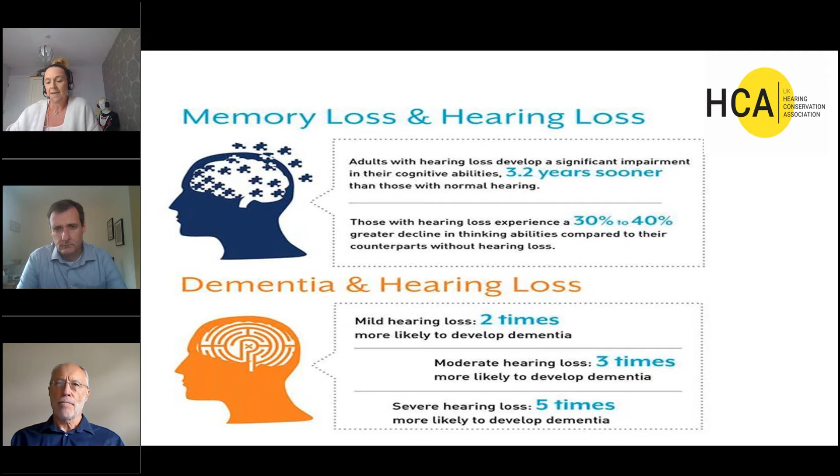But there are apps, and I know the iPhone you can download something which can track your listening levels and give you advice. So again, something that maybe we don't often do in terms of trying to influence people's activities outside the workplace, but when we think of the added exposure that that's bringing, it's obviously going to be really significant. This is something to think about.

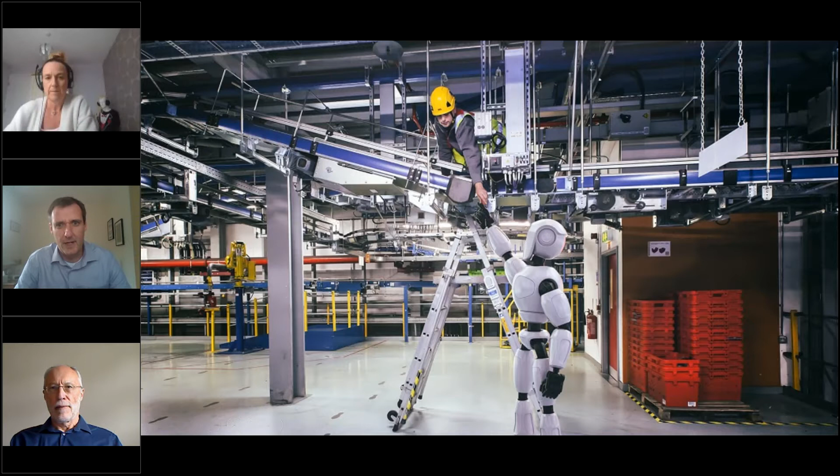Before I jump into all that, I think for a lot of people, the assumption is that the modern workplace is quite a swanky and technologically advanced place where you might even have a robot helping you out. Sadly, for a lot of people who are at work, whether that's in a factory, on a construction site, or outside, the reality is quite different.

It gives you a sense that maybe people aren't taking as much care as they should. For me specifically, when I'm dealing with noise issues, when I'm looking right at the very bottom of the control hierarchy, I'm still seeing poor performance for things like hearing protection.

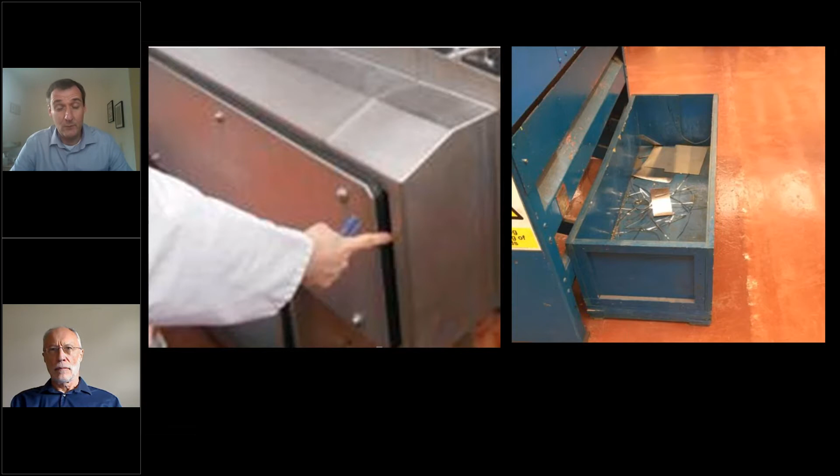As we start to move up the control hierarchy, we still see issues. So even when people have made an effort, we get problems. So the photograph that you can see on your left, this is a machine where there's been some noise enclosure built round about it, and during some routine maintenance, the panel of it wasn't replaced properly, so there was noise leaking out the side. So there seems to be a general lack of understanding, even when controls are put in place, as to how it works and what it's supposed to be doing.

The photograph that's on the right-hand side, that's from a steel manufacturing site that I went to, and this is actually the back end of a guillotine. So you're probably wondering, why am I showing you this? Well, what the company had done was, that used to be a steel box that collects all the scrap metal, and they've replaced it with a wooden box because they thought, well, it'll be quieter, which it was. And admittedly, it's not a particularly exciting and interesting way of controlling noise. It's maybe not the most effective way to do it, but it does make a difference.

The reason why I'm showing you this is, some of you may know I post quite a lot of stuff on LinkedIn. Normally, if I post things on LinkedIn, I'll be lucky if I get about 600 people looking at it. When I posted that wooden box on LinkedIn, I got about 8,000 people looking at it. And I just think that if 8,000 people are interested in looking at a wooden box, there's clearly a demand and a desire to find out how you control noise.

The second aspect, the thing about competent consultancies, I'm sure some of you are aware of this case where a consultant was taken to court for not providing good advice on noise, hand-arm vibration and COSHH. And the fine that he was issued with, the £1,400, is relatively small, but I can safely say, as somebody who used to be a consultant, that being found incompetent in a court of law and having press headlines and industry paper headlines saying that I've been publicly humiliated would be pretty detrimental to being able to carry on doing my job, if that sort of thing had happened to me when I was a consultant.

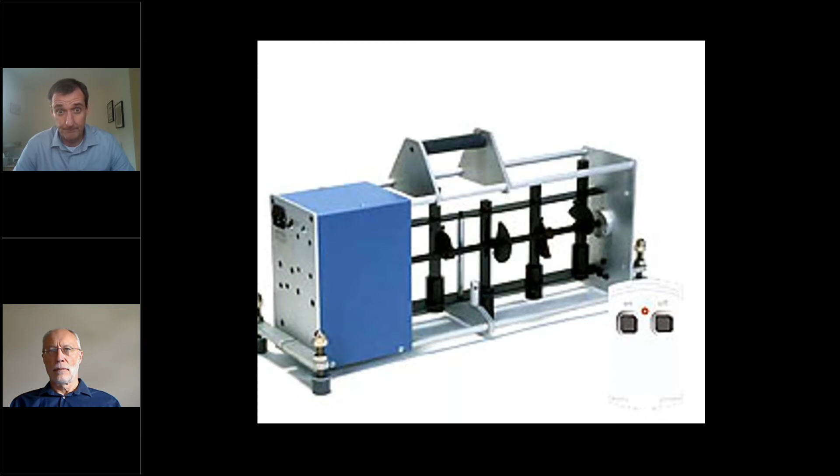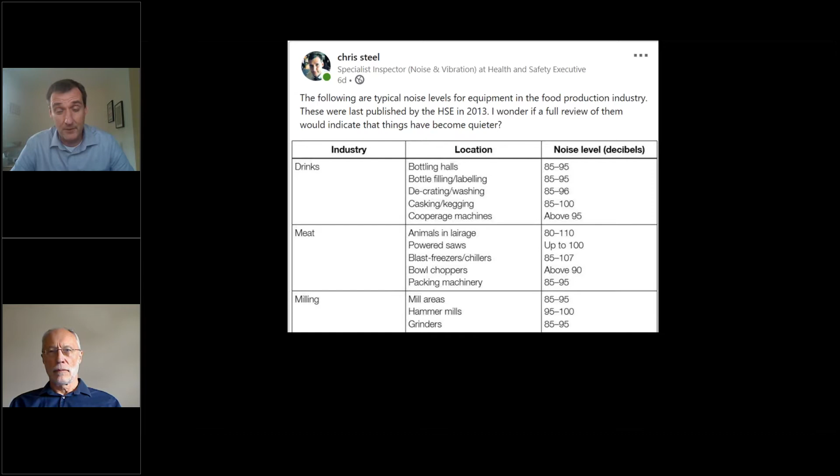The other thing that I mentioned there was the idea of credible noise data, and this year again, this is me posting stuff on LinkedIn, and this is actually taken from a document called Sound Solutions for Food Industry. The information that's in this was republished in 2013, but the noise data you're looking at is probably from the late 90s and early 2000s, so not the newest thing.

Instead of getting my usual 600 people looking at it, I got 5,000 people looking at it, and actually got emails from people as far away as Canada and India asking me, oh, do you have any more of this type of stuff, because we really have an issue getting credible noise data. And that's a perennial issue for the HSE.

Back in 2012, we did some reporting on whether people can find quiet machinery, and most people agreed that they couldn't. And that's not because quiet machinery doesn't exist. It's because it's difficult to find the information that would indicate to you that it is quieter when it's in use. And then similarly, when I did a straw poll myself, I found that in 2020 about 80% of people were also finding it difficult to find reliable noise data when they were asking for it.

So those three things, those three C's, control of noise, competent consultancy, and credible noise data, are the three things that the HSE tends to want to concentrate on, because those are where we find the biggest issues. I suppose the obvious question that comes out of that is, well, what is the HSE doing about this? What's the HSE doing on noise, and why can't we do more?

And I'm probably going to go a bit off message here, but I would ask a question: how much money do you think British industry spends on third-party health and safety advice in a typical year? So this is for all health and safety advice, not just noise. Well, obviously you can't answer me because you're all at home or on your computers, so I'll tell you what it is. It's about £1.2 billion a year spent on third-party consultancy. So roughly that's 10 times the central government budget that the HSE gets.

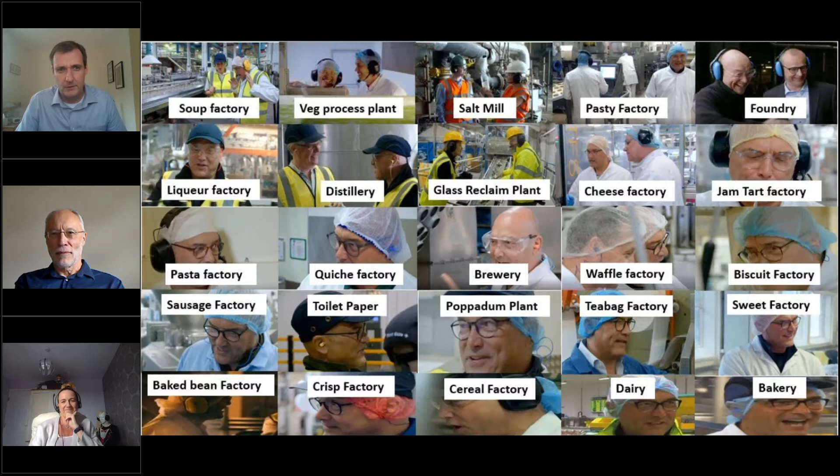I always find that a good way to get a little barometer on that is to sit down and watch a few episodes of Inside the Factory with Gregg Wallace, because you'll find that in pretty much every single episode of that programme, Gregg or Cherry will be wearing some sort of hearing protection, whether he's at a factory making biscuits or working in a brewery. There's noise, and that's a pretty obvious indication that there's still a lot of people in the UK who go to work every day and are exposed to noise at a level that's likely to be damaging to their health. Otherwise, why would they be wearing hearing protection?

Now, I don't want to end this talk with a load of photographs of Gregg Wallace, because it might make you think that I'm stalking him in some bizarre way.

So I'll just leave you with a quick recap, and just to remind you that if you're interested in doing noise management and noise control, those 3 C's, control of noise, competent consultants, and credible noise data, are the key areas that we see you can get the best improvements in terms of reducing noise overall. And I wish you the best of luck with that.

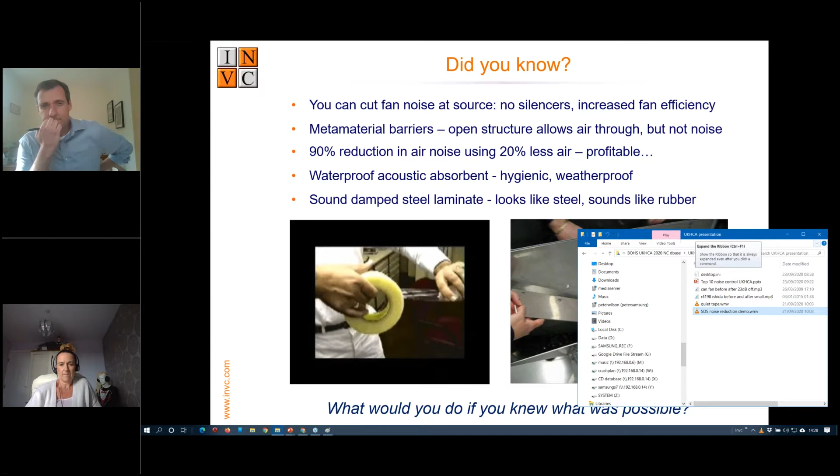Now, I do have a video here. Let me play this. If we look at this, this is an example of using that. Let's hope you can hear it.

Okay, I'll forget about that then. The sound is not coming through, and my computer's gone mad, so you have to take my word for it. This is extremely quiet when you're dropping things onto it.

The other thing is, another example of perhaps something you wouldn't know: who would think sellotape was noisy? Well, I've been in areas where they're packaging and building cardboard cartons, where you're measuring over 100 dBA from sellotape. And there is the weird idea, which I think is pretty cool, but maybe I should get out more, of quiet tape. And you can buy that off the shelf. So rather than putting an enclosure around the machine, you just buy quiet tape.

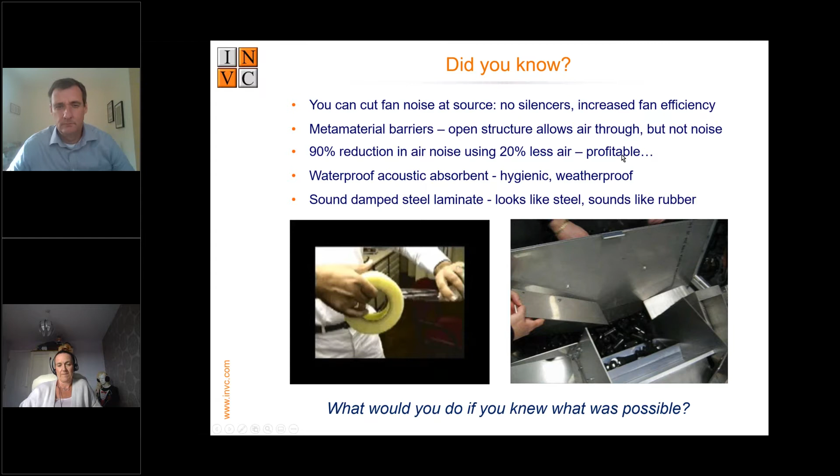Now, if you knew about all these things, what would be possible? As an engineer, I find it really depressing that companies spend 3 to 10 times what they need to spend on noise control and don't get the results that they could get by using better engineering technology. Now, these are the top 10 noise control solutions that we've put together that cover a large number of very typical noise problems across many industries. So I'll be going through these very quickly.

The first one is vibration control, which is vibration damping and vibration isolation pads, both very quick and easy to do. Fans, the way you install them, and new technology for reducing the noise from fans. Pneumatics. I can boldly say, with all these years' experience, there's absolutely no reason why you should have unsilenced pneumatic exhausts on any site, and I'll tell you how you can do that. Pneumatic nozzles, you can save a lot of money by switching to efficient units.

And also chains, timing belts, electric motors, hydraulic power packs, other classic noise sources. A lot of machines have safety guards, but a lot of them don't work as acoustic guards, and it's quite easy to convert one into the other.

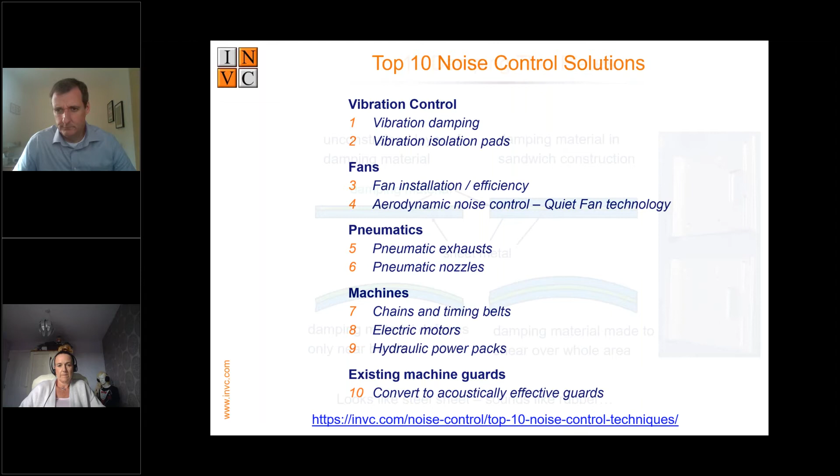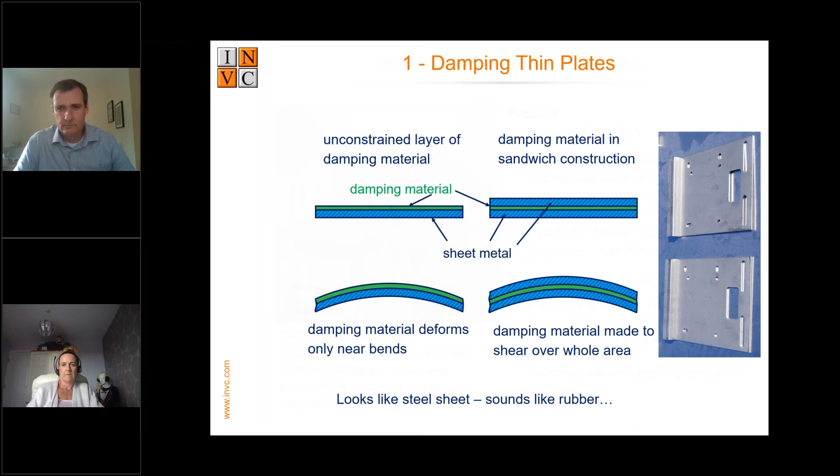The typical application for that is in weighing machines. A lot of industries use weighing machines for sweets, for vegetables, for nuts and bolts, whatever. Typically, noise levels are 87 to 98 or even higher. They're often sold with enclosures, which quite often actually increase the noise level underneath the platform because they're funneling the noise downwards. And they cause hygiene problems in the food industry.

Now, we've developed a solution for this, which largely involves using laminated steel and a few other engineering tricks, which are about a quarter of the cost or less than an enclosure, much more effective, and don't cause hygiene problems. This particular application, 94 dBA with the enclosure in place. With the enclosure removed and all the surfaces damped, it was down to 82 dBA. And also it meant the cleaning time was reduced from a whole day down to about an hour. Now, the manufacturers know what we do, but they make more money out of selling enclosures.

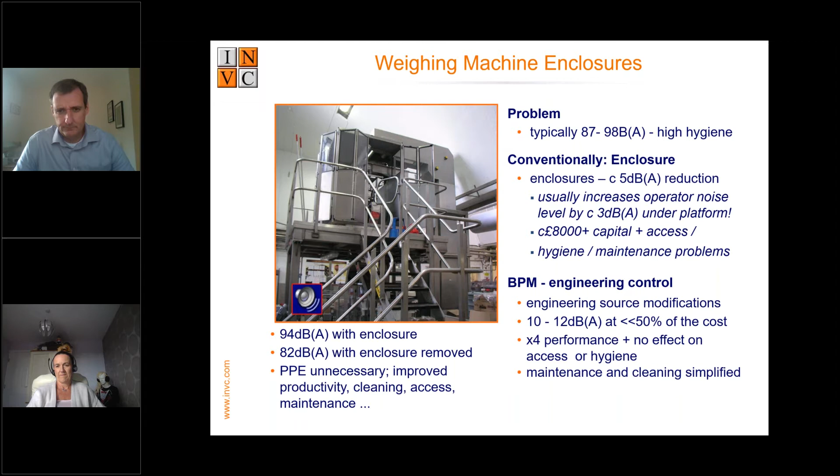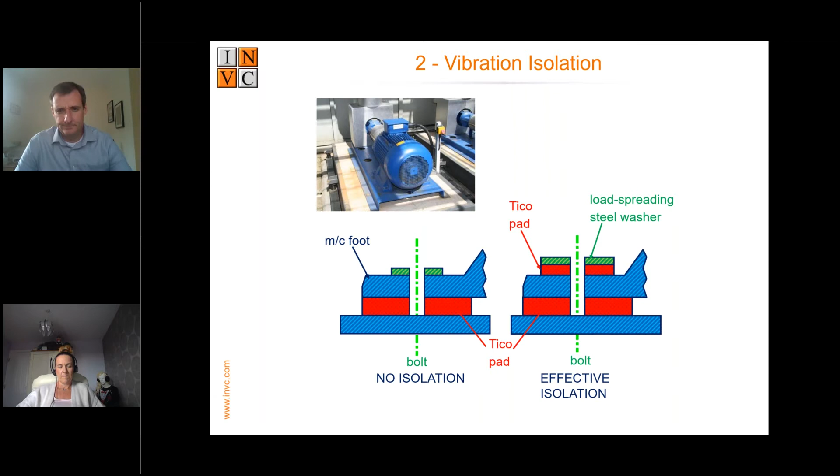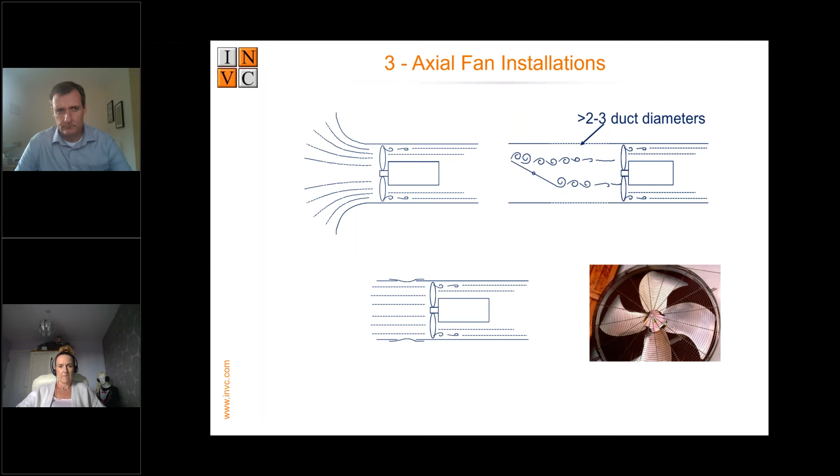If you can increase fan efficiency and therefore reduce the speed of the fan, apart from the cost savings in terms of power, you get a big reduction in noise because noise is proportional to the fifth power of fan speed. So a 20% reduction in fan speed reduces the noise by 5 dB, which is a factor of 3. So 20% off fan speed, you get 67% off the noise risk.

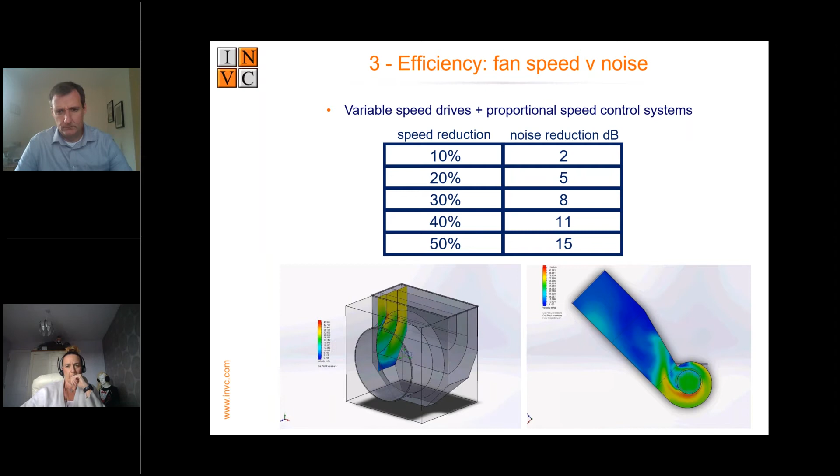If miraculously you can reduce the fan speed by 50%, you reduce the noise by a factor of 30, and therefore the risk by a factor of 30. So efficiency is a key point in looking at any fan system noise. There are also aerodynamic fan noise control technologies.

In this particular case, you've probably lain awake at night wondering what system they use to suck aluminium cans that are bent or broken off the line so they get recycled. Well, they use what are called chopper fans, which suck the damaged cans off the line, and then the cans are shredded by passing through the fan. As you can imagine, it's a pretty noisy process, and this caused both environmental and occupational noise problems.

Massive noise problems. They were quoted £35,000 for silencers, which had to have the cans go through them, lagging enclosures and so on. Instead, they went for aerodynamic noise control, which cost about £3,000 per fan and reduced the noise by 22 dBA, a fraction of the cost and without all the hassles. So knowing what is possible can mean that things get done to reduce the risk rather than just being left or postponed because it's going to be expensive.

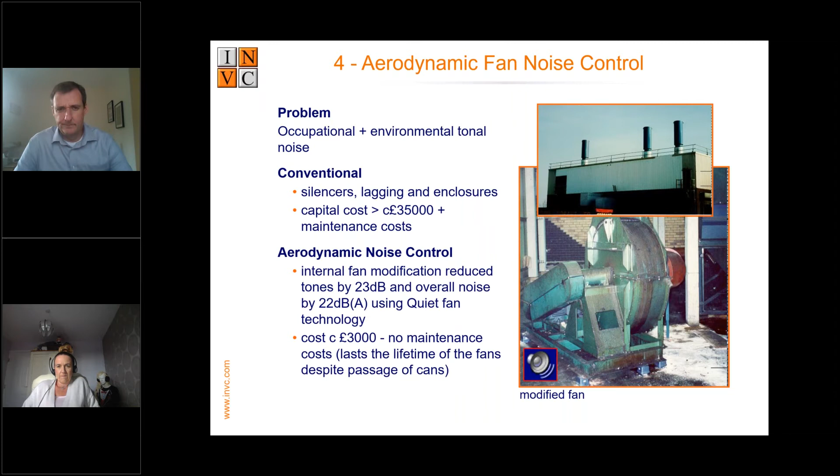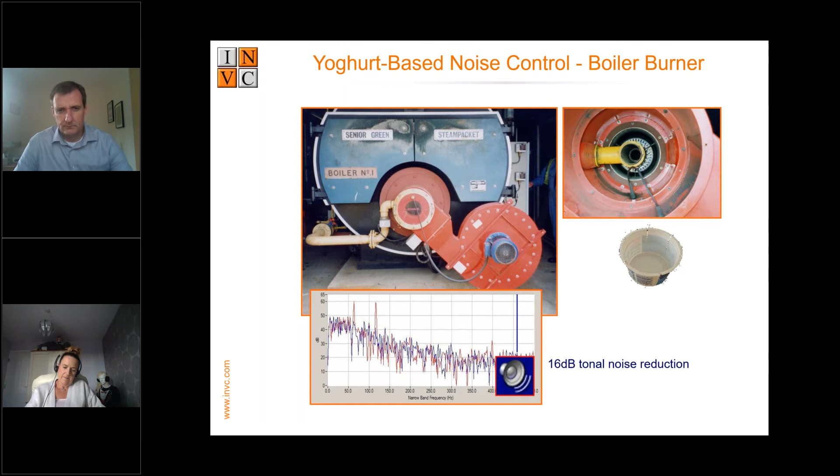Just as an aside to show you what can be done, a colleague of mine fixed the noise from this boiler burner by using a yogurt pot. It's the only known case of yogurt-based noise control. He said, I think it's the burner problem. Got a yogurt pot from the canteen, did a Blue Peter exercise cutting it up, and now they just have aluminium yogurt pots inside the burner. That reduced the tonal noise problem by 16 decibels. So it's knowing what is possible.

Pneumatics, very common noise source. Now, there are probably about 70 or 80 different types of silencer around, and the big problem is a lot of them don't work very well, and they can cause back pressure, which can affect the operation of the machine. However, you can buy straight-through silencers, and the bottom picture shows manifolding multiple exhausts into one straight-through silencer. So you can stick a 1 or 2 inch pipe along the side of a set of machines, plumb all the exhaust ports into that, and stick a straight-through zero back pressure silencer on the end.

Also, I recommend standardizing on 3 sizes of silencer across the whole site. So you have small, medium, and large. That way, you can just replace a silencer with one of those. You just fit adapters to make sure they all fit. That makes life easy for the maintenance engineer, because if a silencer goes missing, the machine still works. It's just that it's very noisy.

Efficient off-the-shelf entraining nozzles are about 10 dB quieter at the same thrust and use 20% less air. They're also intrinsically safe. They pay for themselves very, very quickly because they use less compressed air. So there's really no excuse in almost all circumstances for not using these sorts of nozzles.

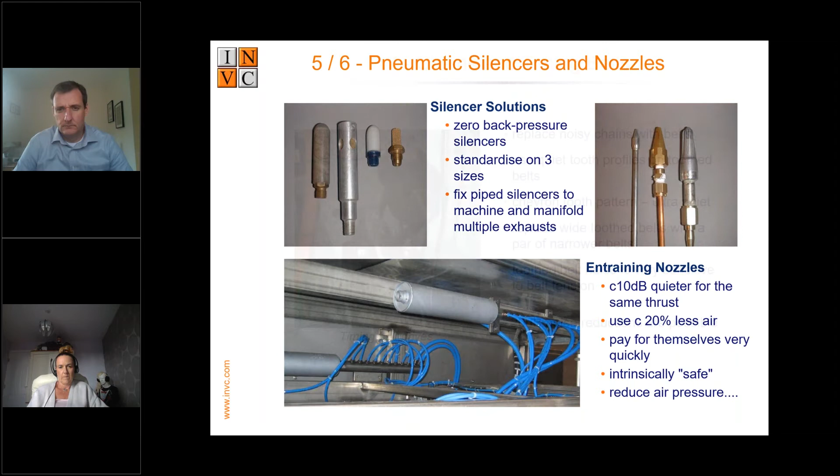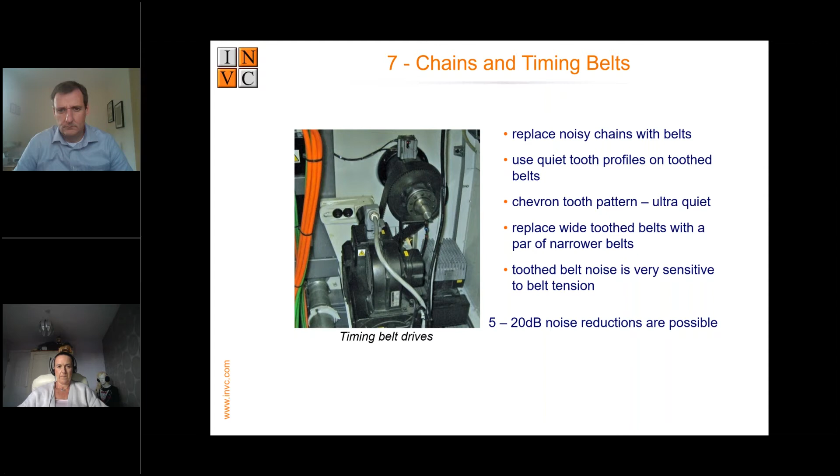Chains and timing belts can also be very noisy. Quite often noisy chains are noisy because the chains stretch and rub against guards and so on. If you switch them for belts, that can make it a lot quieter, but also you can buy quiet belts with a chevron tooth pattern, or if you've got a wide tooth belt, replace it with 2 narrow tooth belts with the same load capabilities. That will dramatically reduce the noise. Also, make sure the belt tension is correct, and between 5 and 20 dB noise reductions are possible by doing these simple things.

Motors, very, very common. We've measured motors up to about 100 plus dBA because of the high-speed fan on the back. You can buy off-the-shelf quiet motors that are 10 or 15 dB quieter and more efficient. So feed them into your system, replacing noisy motors with quiet motors. Again, this is a profitable exercise because they use less power in the long term.

Hydraulic power packs are an absolute classic. Basically, a motor pump unit isn't that noisy, they're stiff. So what people do is the manufacturer will often bolt these to a large oil tank. And the result of that is that high levels of noise are radiated by the tank, which acts like a loudspeaker.

And I'm just wondering whether everyone can hear me because it's all gone dead. Yep, noise is still fine for us. You can still hear me. Okay. It just went very, very quiet, and I got a buzz. I think the webcam's gone. But that's fine. The sound is there, the presentation's there. That's all good. Okay, cool.

So what the manufacturer then does is bolt the motor pump unit to a large tank, which acts like a fantastic loudspeaker, amplifying the noise as much as possible. Now, some manufacturers put enclosures over the top of the tanks, and all you're doing is bolting on a large loudspeaker. In one case, this doubled the noise level.

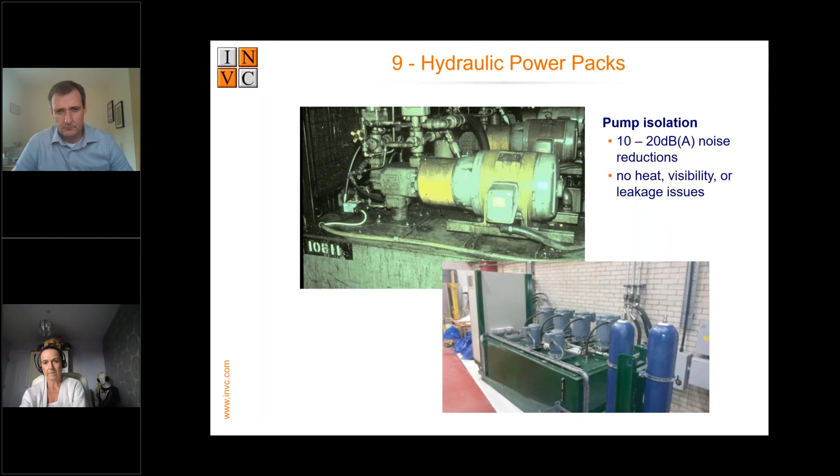However, using vibration isolation and flexible pipes, which is, again, the anti-vibration pads, you can reduce the noise by between 10 and 20 dBA very quickly, very easily, and without obstructing the view if there's a leak. So you're not hiding the machine, so you can see if there's a leak. Also, you're not going to have the thermal gain problems that you get if you put an enclosure or a screen very close to these things.

Finally, existing guards. Fundamentally, if you have a guard with a few gaps, halving that open area of gap will reduce the noise by 3 dB, which is a 50% reduction in risk. So you can walk up to a machine and go, okay, it's got a 2 centimeter gap around the guard. If I reduce that to 1 centimeter, I halve the risk. If I reduce it to 1 millimeter, I reduce the risk by 90%, which is a 10 dB reduction.

The other trick is to fit acoustic absorbent inside the guard. If there is no absorbent inside, then this will reduce the noise inside the guard by around 5 dB or more. And that can even be very hygienic acoustic absorption as well. And if the guard is radiating noise because of vibration, you can damp it in situ or just replace the guard with a laminated steel version.

And here's me doing a very, very sophisticated mock-up using cardboard. Having been trained on Blue Peter from a very early age, that's the sort of thing that quite appeals.

So you can work out the trade-off between noise reduction and reducing the gaps round guards in a graph like this. As Chris mentioned, purchasing policy is very important. So some of these things should be applied to new plant before you get it. Unfortunately, many manufacturers do not understand engineering noise control. So they will tend to not necessarily use best practice to try and make quiet plant.

So summarizing overall, there are two key things to reduce risk quickly and easily. One is PPE performance can be dramatically improved through very simple measures. So that's the first step, which you can do immediately. Second step is to look at the low-hanging fruit associated with engineering noise control and just knowing what's possible in terms of noise control. 50 to 80% or more reductions in risk at very, very low cost,

and sometimes they will pay for themselves. And if you combine those two into one, you can really reduce your risk by 70, 80, 90% at very little cost. And this could save the economy about 4 billion per annum, estimated in reduction of the cost of noise-induced hearing loss.

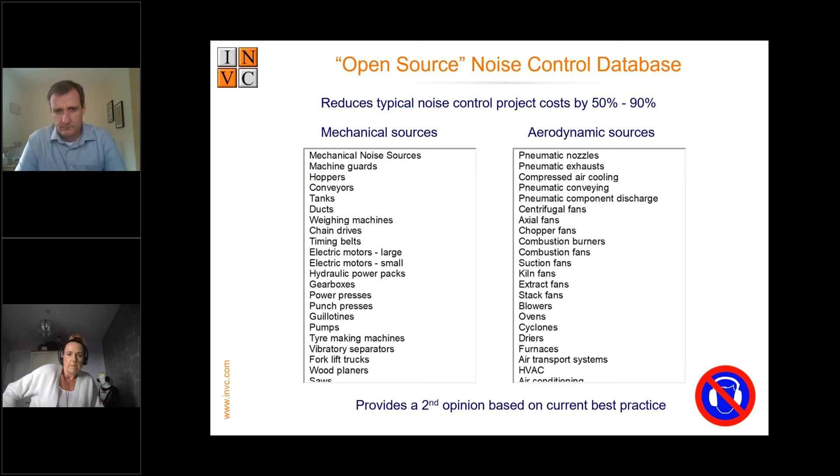Now, we have this massive database of noise control fixes, a bit like the HSE database, and a load more sources on there. None of them involve enclosures. So these are all low-cost engineering noise control techniques. And basically, we've decided to make it open source. So if you need information on simple engineering noise control, just to find out what's possible and what sort of cost it is, do things like going on the HSE website.

On our website, you can search through our database of noise control fixes. And if you can't do that, or it's not on there, you can go through a process and send us the data by email. So send us some noise levels and noise data or pictures of noisy plant and a smartphone video clip. We will run that through our database, no cost.

Have a look at the soundtrack, analyze that, and give you a list of the noise control options and typical likely costs. Also, if you're looking around a site and looking at a piece of plant that's noisy and wonder what can be done about it, if you've got a mobile phone with WhatsApp on it, you can arrange a brief review with one of our engineers free on WhatsApp.

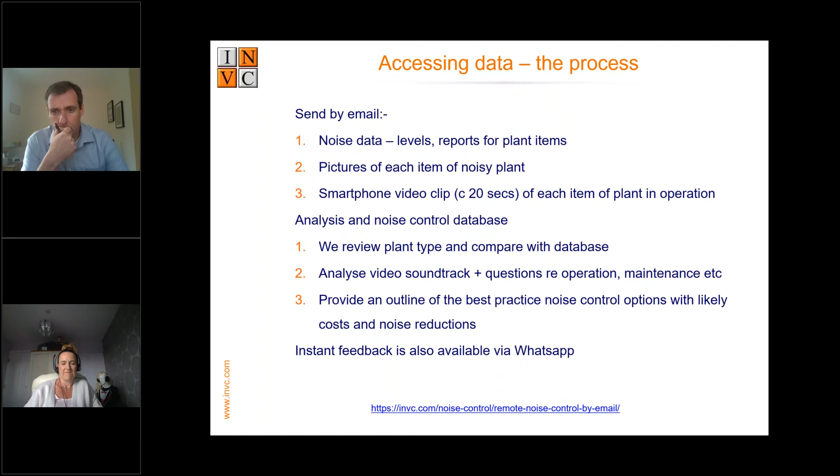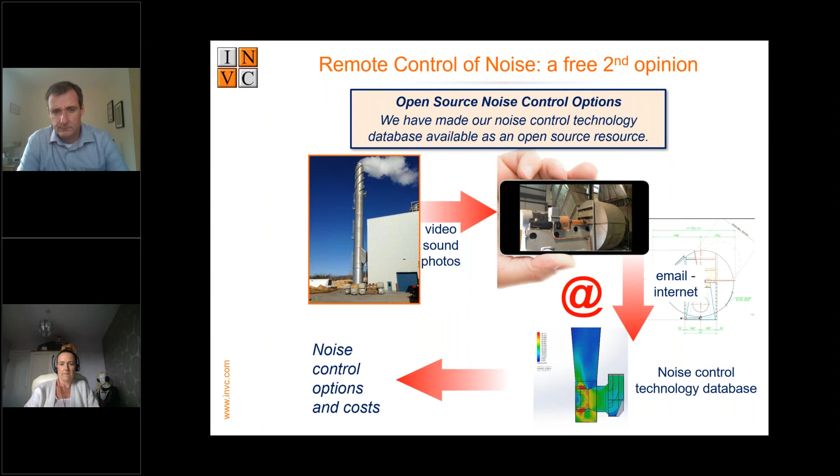So you can say, this machine, what do you reckon? And you go, you're doomed, there's nothing you can do about it. Or we might say, there's a simple solution. So email us videos, we'll run it through our database and provide you with a list of the noise control options just so you would know what was possible. Or you can do it on our website, and that's accessible from anywhere on the planet.